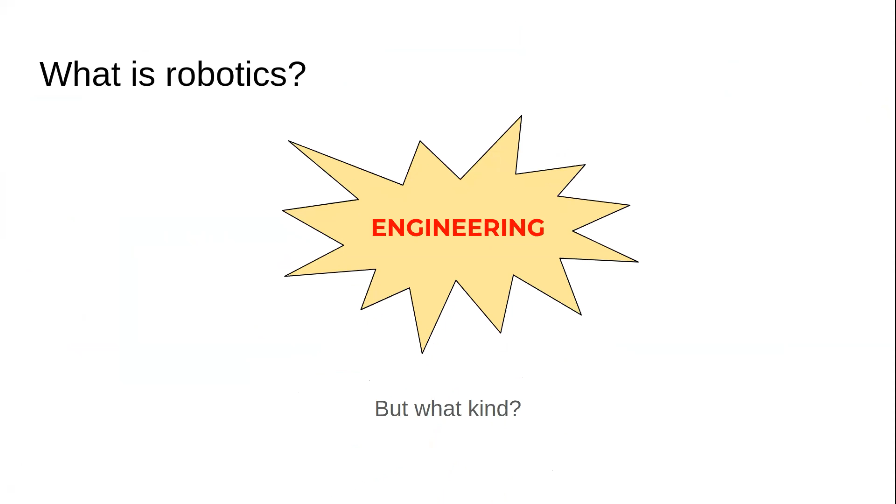Okay, so what is robotics to me? Well, fundamentally, it is engineering. Robotics is about engineering. But what kind of engineering? Because there's a lot of different kinds. There's mechanical engineering, because some robots have arms, some even have legs, and some have whatever this thing is. I don't know, is that an arm? Is it a mouth? A neck? I'm not really sure. But it's pretty cool, and I guess it can be useful. Whatever it is, it's very mechanical, and if you want something like that on your robot, you've got to be pretty good at mechanical engineering.

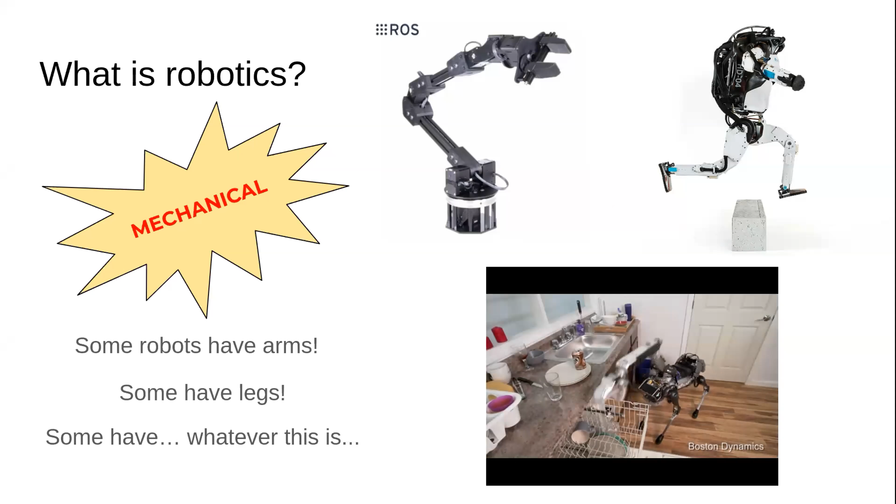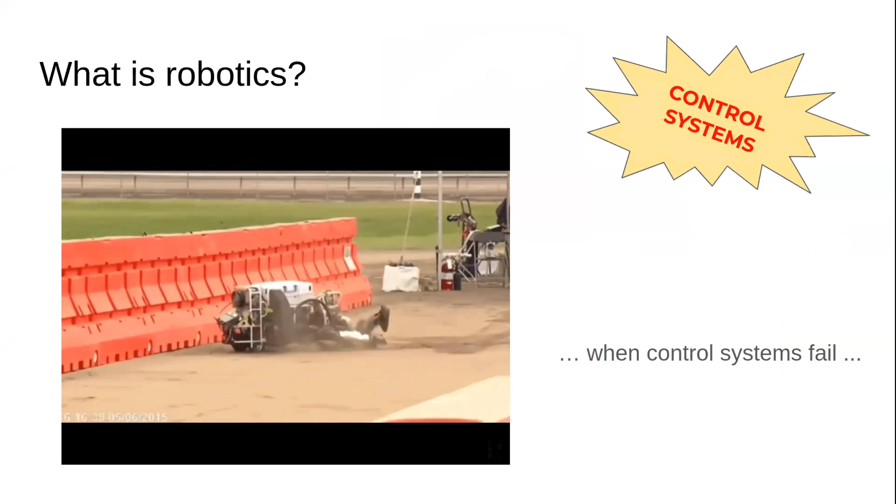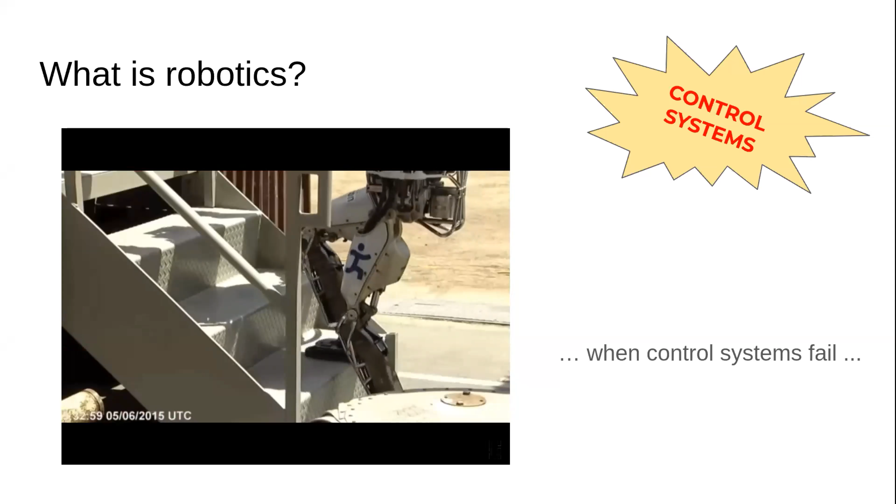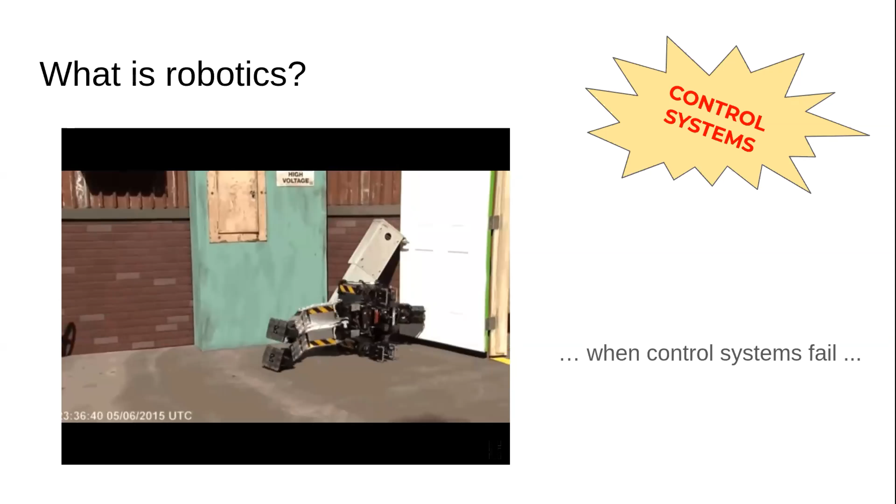What else is robotics? It's control systems, because this is what happens if your control system is not good enough. You need to be able to make really good control systems for your robots, otherwise this happens. Mechanical engineering is not enough, because these robots you see are absolute masterpieces of mechanical engineering. This video is from about 5 years ago, and these were the best robots in the world, the most advanced mechanical designs in the world. But without a good enough control system, they can't actually do much. Boom, and this is a lot of money, guys, crashing and burning with every single one of these falls. Very expensive, this video is very expensive.

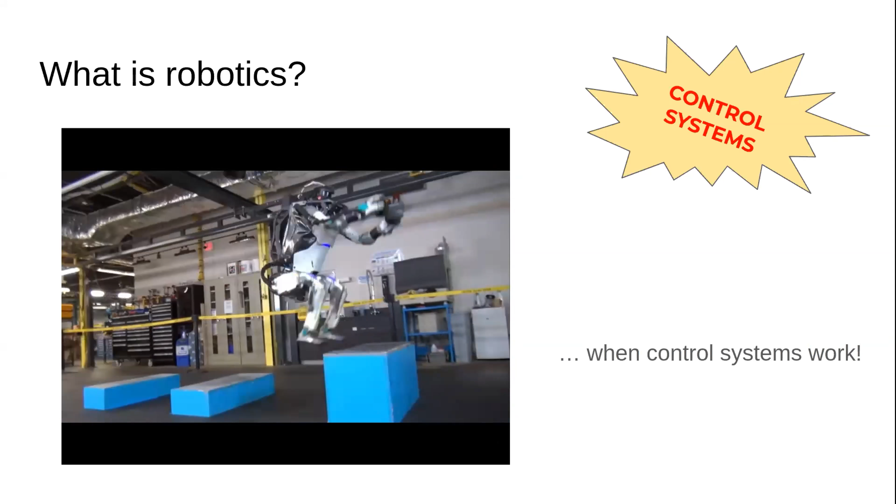All right, so what happens when you do have good control systems? You can get stuff like this. This is arguably the best control system in the world, developed at Boston Dynamics. Super impressive. I'm sure you guys have seen their amazing videos, and they really have the combination of incredible mechanical engineering and incredible control systems engineering to thank for that.

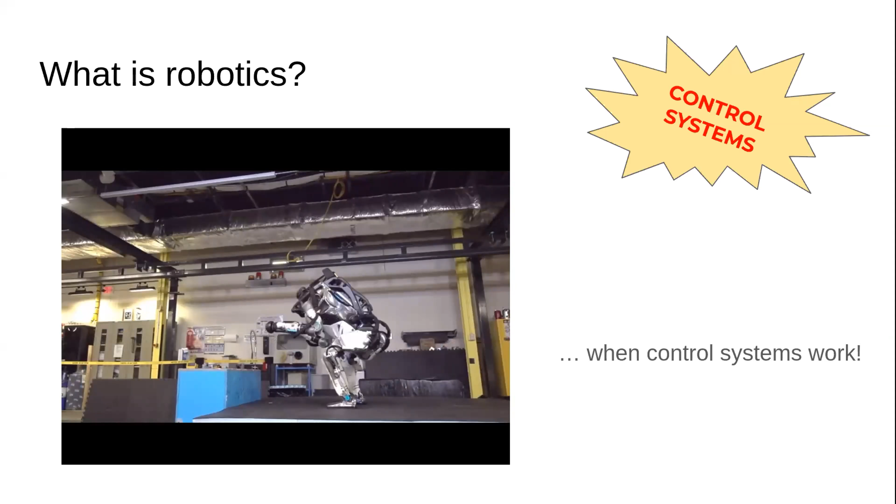Okay, so what else is robotics? It's networking. These days, multi-robot systems are becoming very, very popular. There's a lot of economic incentive to just cram a bunch of robots into one place and have them do useful work. But for your robots to actually do that useful work, not only do they have to have good mechanical design and good controls, but they need to be able to communicate with each other or with servers or something.

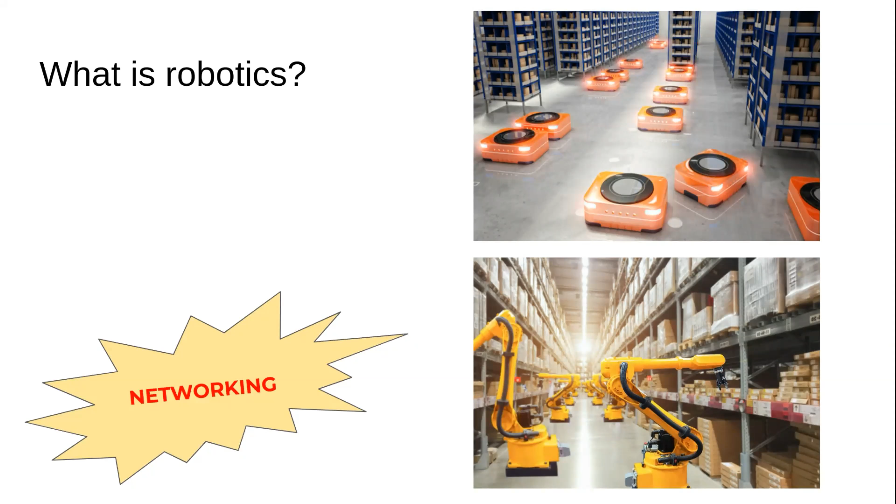So networking is extremely important in modern day robots, and it's going to become even more important over time. That's the trend I'm seeing in the industry: people want lots of robots in their facilities, and they all need to be good at talking to each other. All right, what else is robotics?

Vision and perception. If you want your robot to be able to get around in the world, it needs to be able to see things and understand what it's seeing, or feel, if you prefer other kinds of sensors. But your robot needs to be able to perceive.

So at the top, there's a point cloud. That's a very popular way to get a sense of what's taking up space in your environment. You don't necessarily know what the things are, but you know there is a thing there. And then at the bottom, you can see some object recognition happening. This is almost certainly using machine learning, and it's identifying that there's a bunch of cars, and then it sees the bicycle, and it sees the person on the bicycle, and it's able to create this semantic understanding of what the sensor data is providing.

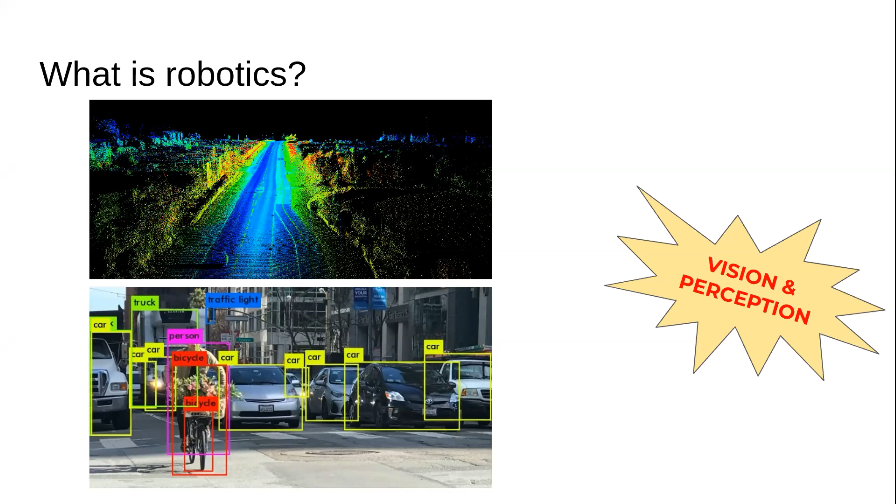Okay, what else is robotics? Artificial intelligence, my favorite.

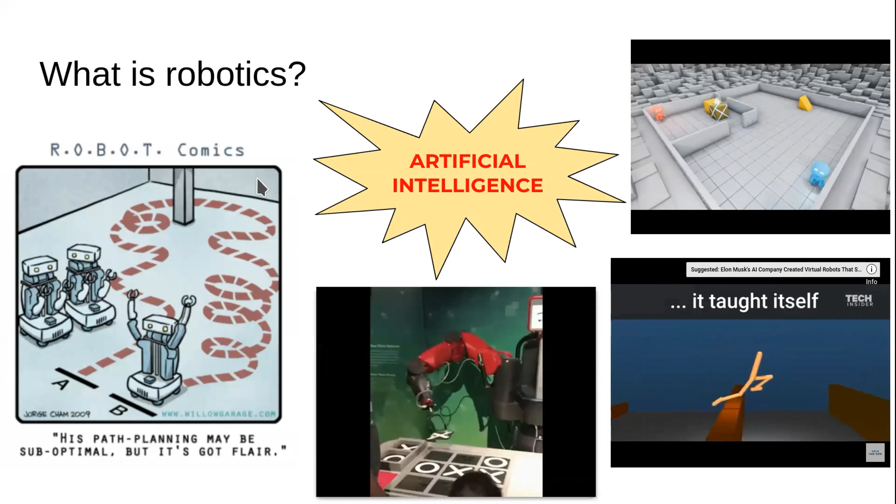Robots need to be able to move around through the world if they're mobile. They need to know how to get from point A to point B. And they don't always do the most efficient job, but they need to be able to get there. And here you can see a robot cheating at tic-tac-toe. Look at those shifty eyes, it knows what it's doing.

And then there's all sorts of more sophisticated AI that usually exists in simulation, but maybe can be ported over to the physical world. So up top, we see these simulated agents playing this competitive game with each other, using some simplification of physics. And then at the bottom, we see a robot learning to walk. It's not quite the same as a human baby learning to walk, but there's some similarities, right?

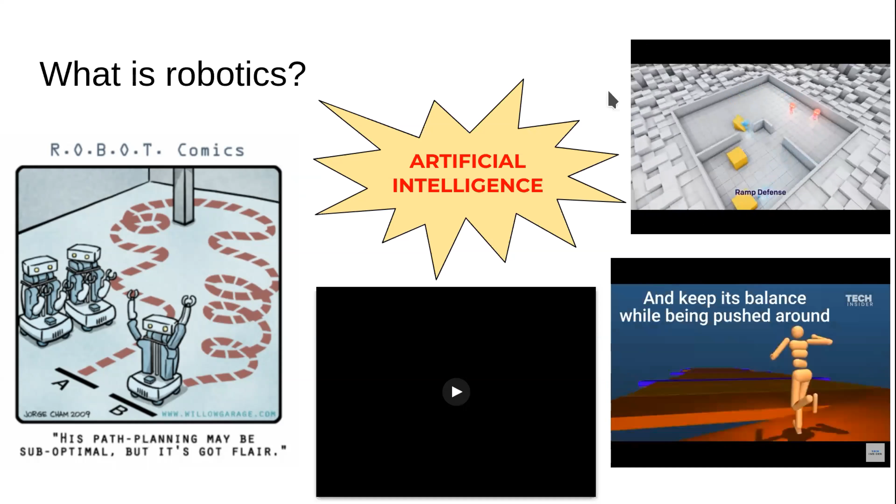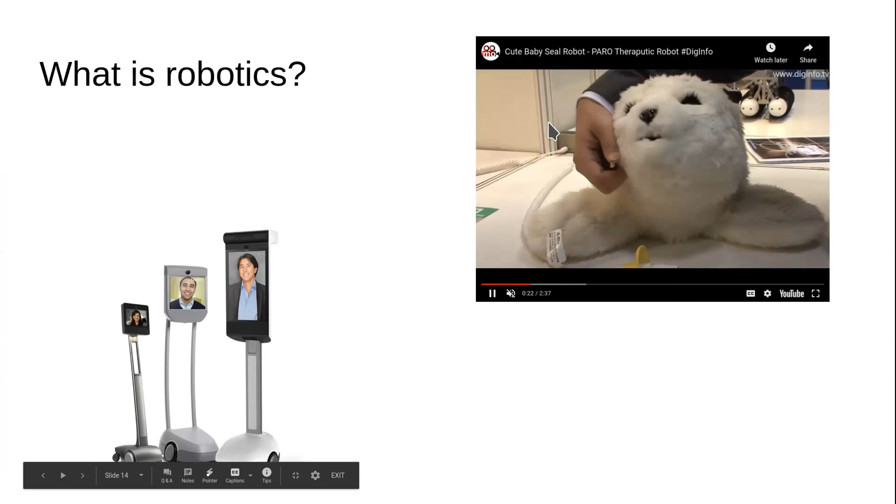Okay, what else is robotics? Human interaction. Some robots need to be able to interact with others, either for telepresence, or there are even robots whose specific design is to make people feel good, to inspire emotions in people. So the seal up here was actually designed for the elderly, to give them a companion.

Okay, so robotics is all of these things, often all at once, all together. So my final answer to this question of what is robotics is: it's really, really difficult and very complicated. These 6 starbursts are each their own entire expertise. You can get a PhD in any one of these 6 things. You can be a world expert in any one of these 6 things and be considered brilliant.

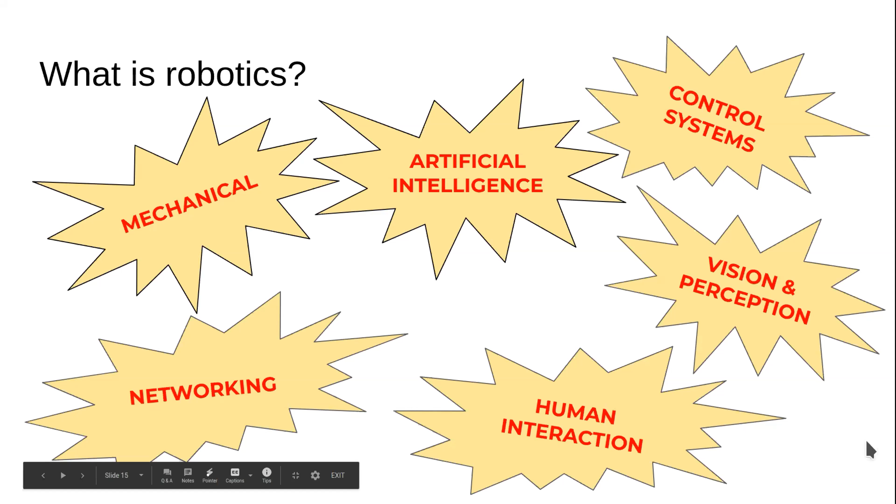But to be a roboticist, you usually have to have a pretty good handle on at least 2, preferably 3 of these topics. If you're really good, maybe 4 or more, but usually people get stuck at around 3. So it's really hard, and usually one person just cannot do it alone. It's generally just not feasible because of the sheer difficulty and complexity. So it's really, really difficult and very complicated.

So what can we do about that? Historically, robotics was only used by large companies that had a lot of resources, companies that could hire a lot of very talented engineers to work on these really tough problems. Robots would only be deployed in extremely controlled settings, so no people around that might make a mistake the robots weren't programmed to deal with. So we're talking warehouses, back rooms, factory lines.

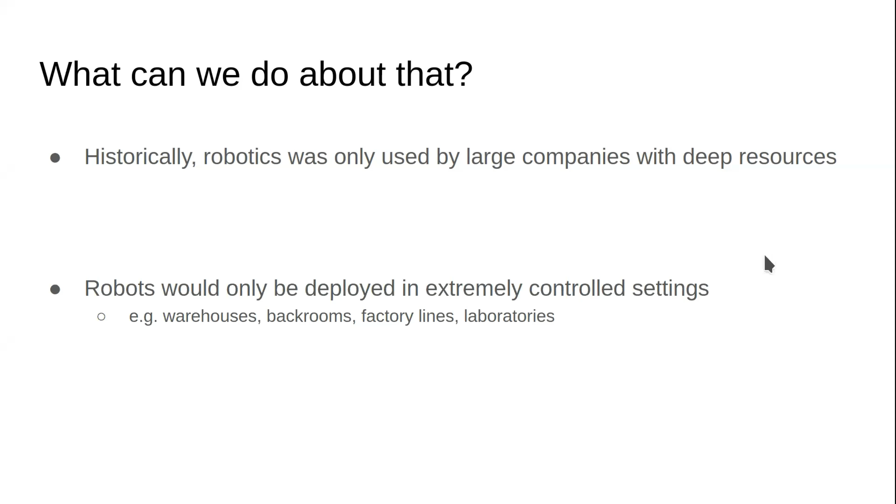For decades now, most robots are literally put into cages. And if you open the cage, the robot just turns itself off, because otherwise, if a person steps in, that person might get killed by the robot. So robots historically have been very contained and very limited in their use. And on top of all of this, robots are very expensive. So even if you have expertise in any number of the 6 fields I mentioned earlier, it's still going to cost you a lot to actually have a robot you can use to research with.

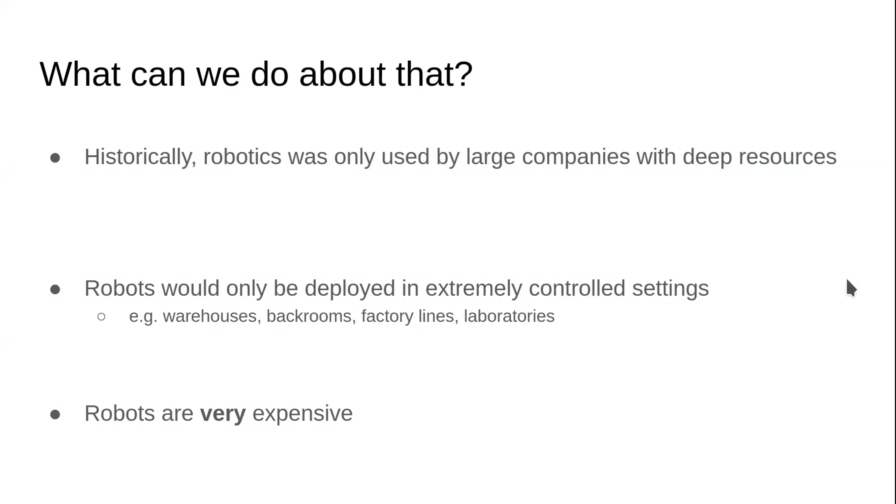All right, and now what can we actually do about that? So I work for Open Robotics, formerly known as Opensource Robotics Foundation, now expanded to Opensource Robotics Corporation, and now we have a Singapore office, so there's even more structural complexity there. But the overall organization we refer to as Open Robotics. That's like a catch-all term for our whole structure.

So we are an open source software company, and we offer 2 major products, ROS and Gazebo. These are both 100% free, 100% open source software products. ROS is a middleware for robotics, while Gazebo is a simulator for robotics.

So what is a robotics middleware? What is ROS, basically? ROS allows communication between different processes in a computer. It also allows communication between different robots or computers or devices or servers. Now, on the surface, that probably doesn't sound all that relevant to robotics. This is an entire description of ROS, basically. It allows communication between different components. So you might be thinking, well, how does that help me build a robot or do robotics or anything?

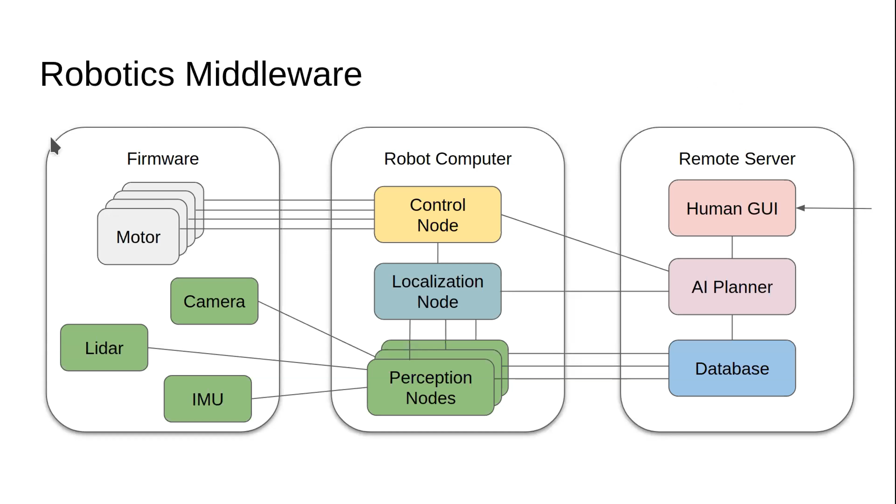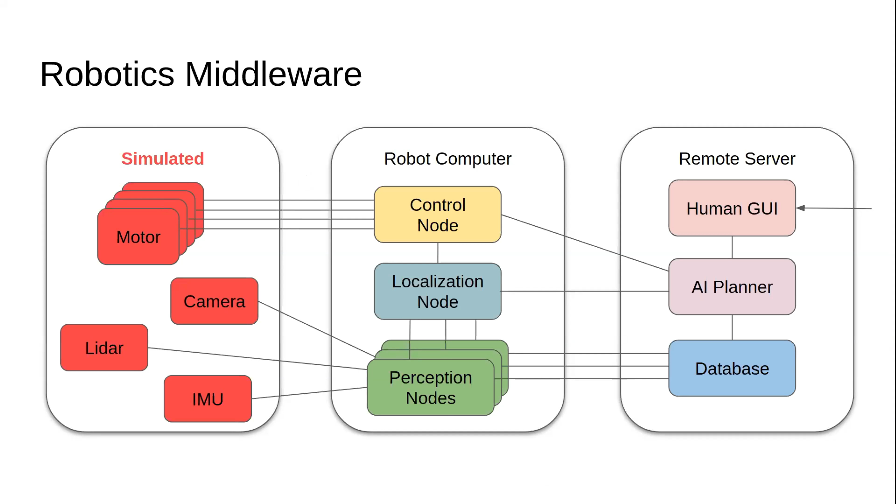So what Gazebo does is, going back to the robot diagram before, this firmware part represents the robot hardware. We can swap that out for simulated nodes. Gazebo will pretend to have motors, pretend to have a LiDAR, pretend to have a camera, and other sensors. All of these nodes send and receive messages in the same exact way that the actual hardware would. So any other nodes you work on will work just the same whether you use them on a Gazebo simulated robot or on an actual physical robot.

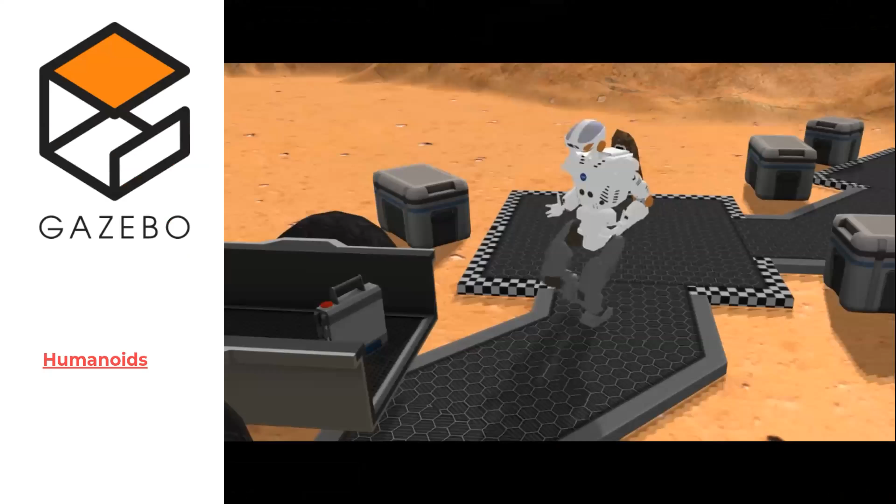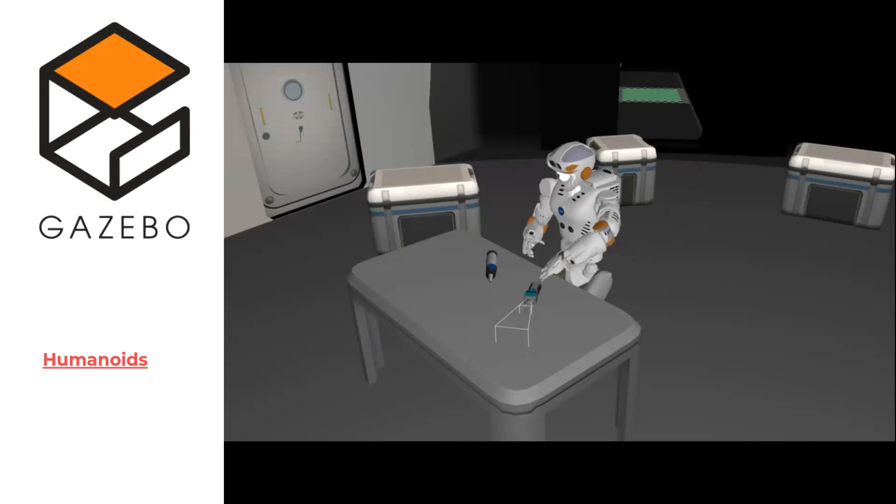Here's some examples. This was part of a space challenge, a simulation competition where contestants had to teleoperate a humanoid robot on Mars. For the competition, you would actually simulate the communication delay that would exist if you tried to control a robot on Mars. So the software the contestants develop needs to be prepared for that delay. They need to design their teleoperation to cope with the huge delays between Earth and Mars, so they try to make their robot as autonomous as possible and require as little human intervention as possible.

The contest involved interacting with various objects and tools. Here, this is scanning for a simulated microfracture. The tool that it just tossed on the ground was scanning for the existence of a crack, and Gazebo was simulating the scanner data. Now it's using a tool to repair that simulated microfracture. And yeah, they just keep dropping tools on the ground, I guess there weren't any points awarded for being nice to your tools.

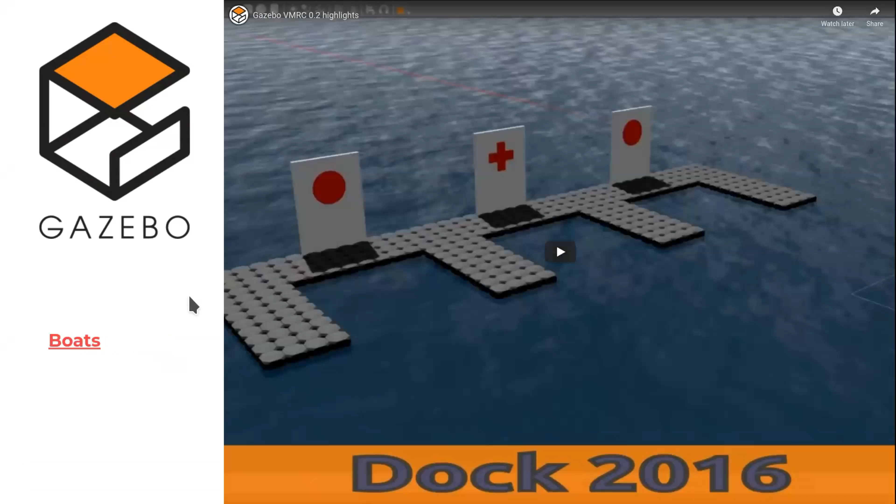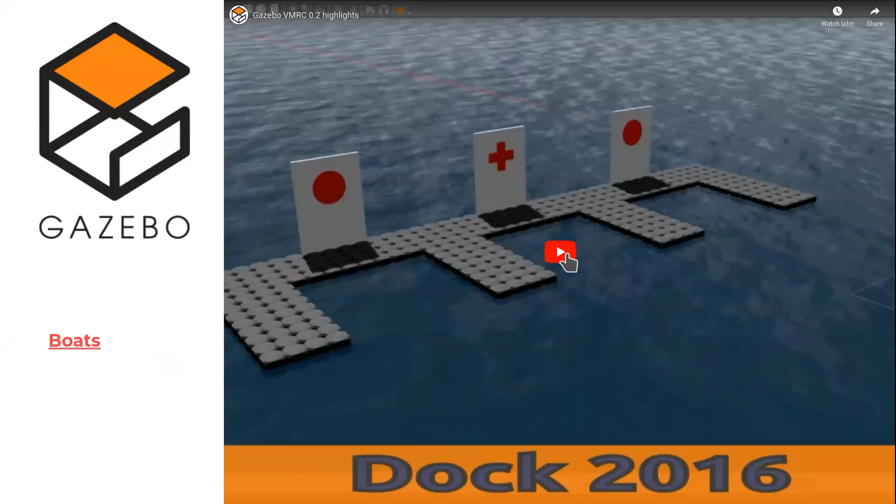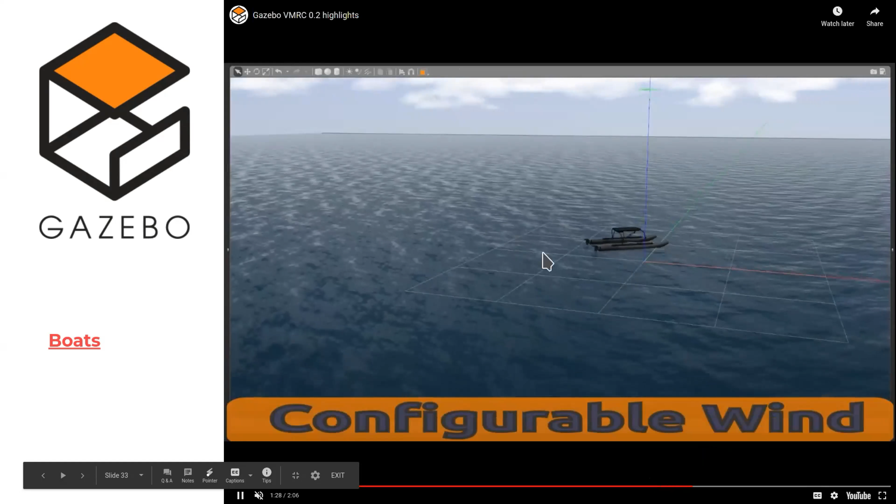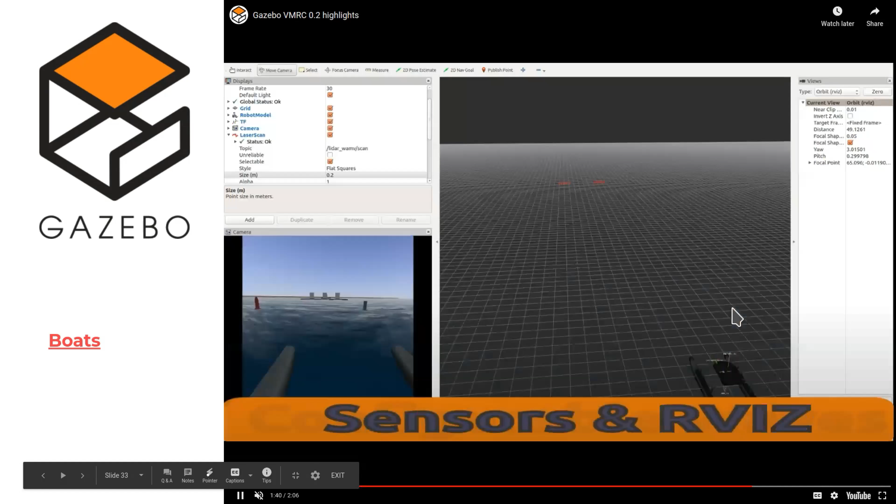And this is all in the same simulator as the other robot and subterranean environment. We get this kind of flexibility in the simulation by being a plug-in based simulator. So to get this buoyancy and drifting, someone, well, I think us, wrote a plugin to tweak the physics of the simulation so that these boats will float and drift. You can write your own plugins to change the way the physics behaves in Gazebo, and you don't have to change anything about the existing software. You could fork Gazebo and rewrite it for your own purposes, but forking is usually a bad idea for various reasons we can discuss later. The point is you don't have to change source code to change the physics of the simulation, you can just write your own custom plugin.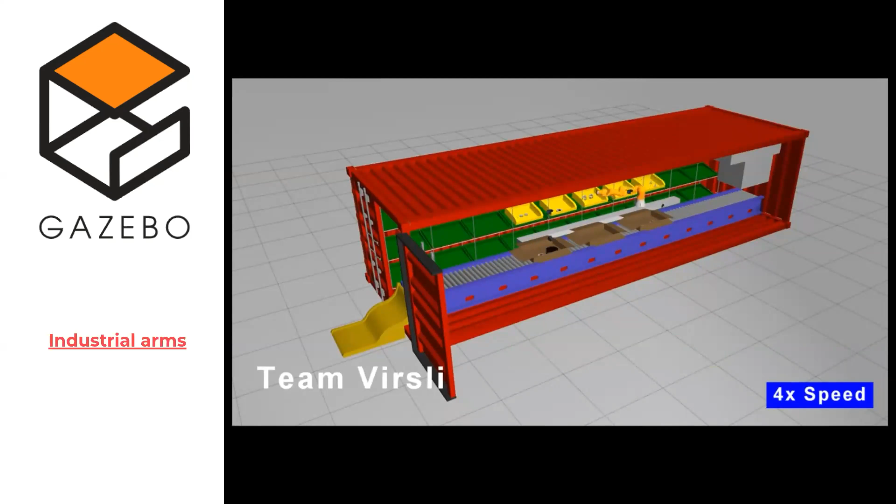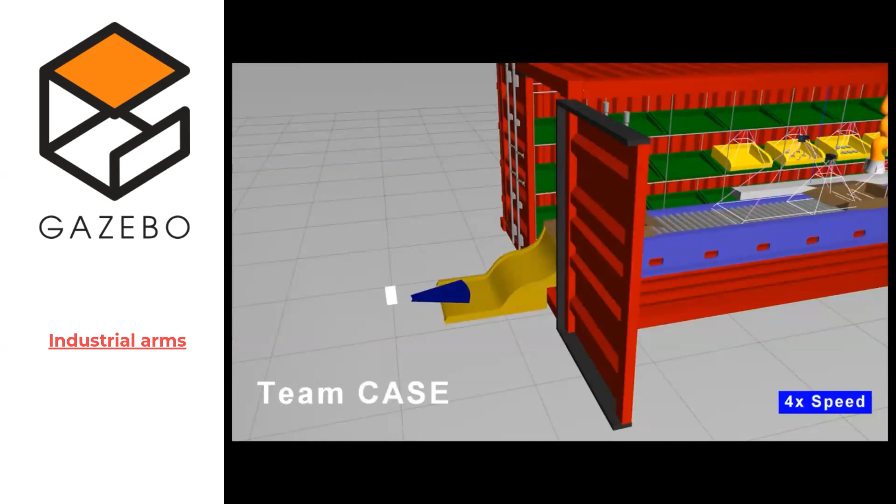Usually industrial robots are very rigid about what they can actually do. Here you see this robot sliding up and down the conveyor belt, whereas usually a robot in an industrial setting is just bolted in place. The goal here was to have one robot that can serve a bunch of different functions.

That could be a way to reduce costs, because robots are very expensive. So if you could get one robot to do the job of 3 or 5, that would be a huge cost saver.

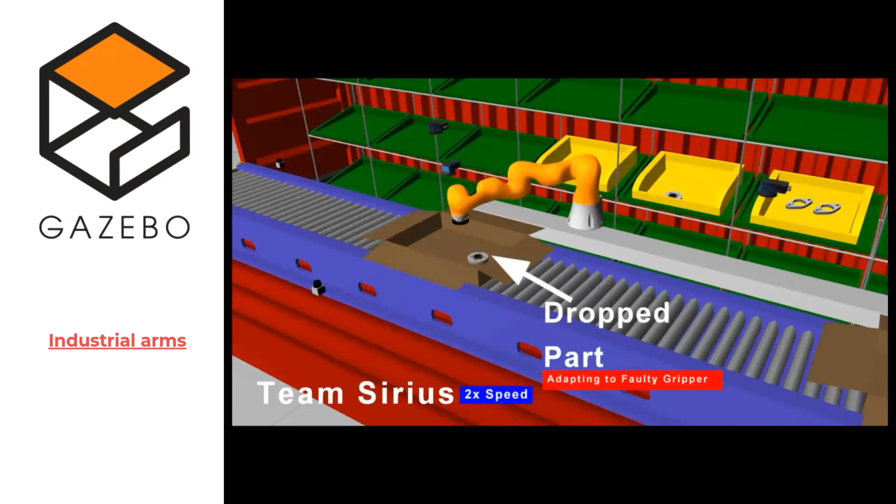This was a competition sponsored by NIST, a US government agency, the National Institute of Standards and Technology, I think. So what you're seeing are the entries of a bunch of different contestants that did pretty well at the competition.

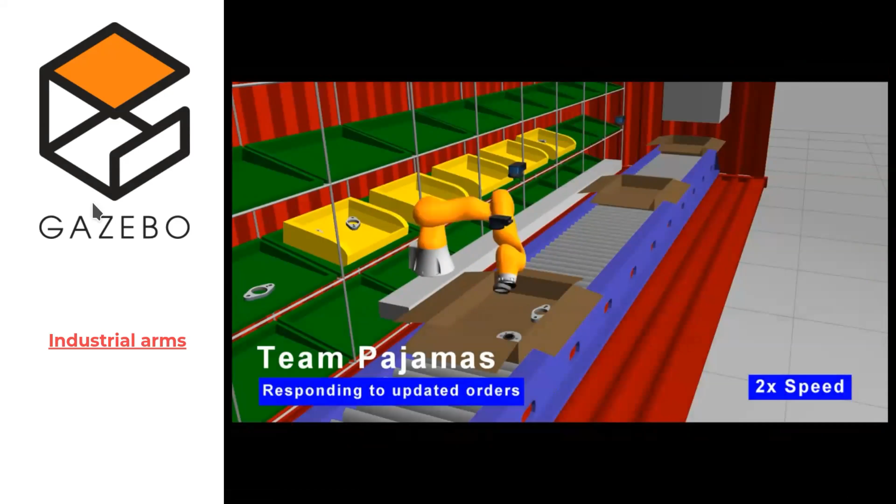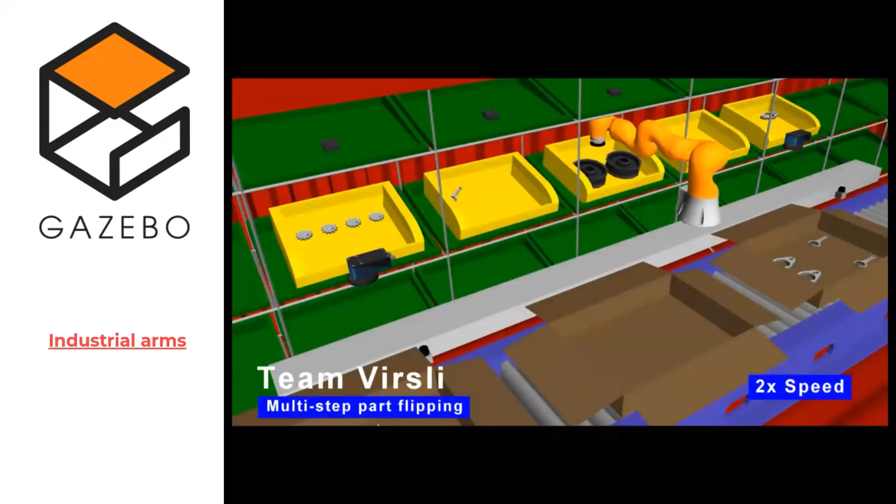All of the source code for this competition is free and open source. So if you want to try to compete—well, the competition is over, but if you want to see how well you can do—the source code is all there, ready to go, ready to be used, just like it was for the contestants.

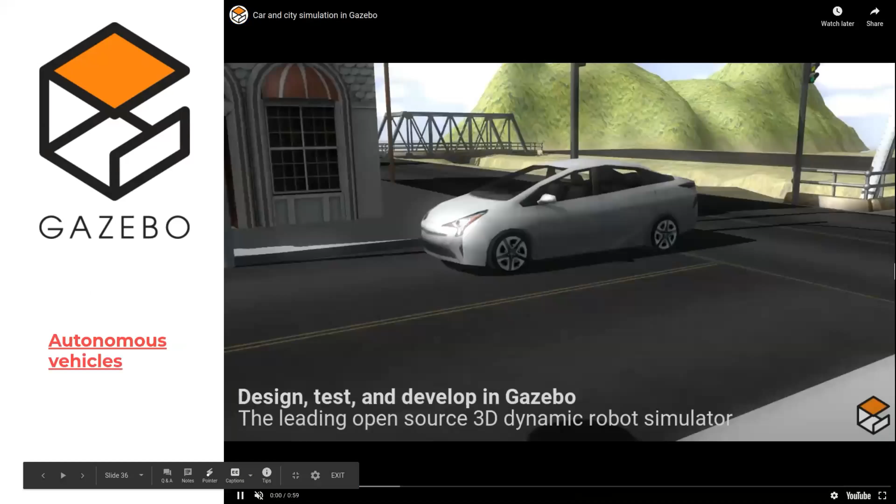Autonomous vehicles are very hot these days, and those can also be simulated in Gazebo. You don't even need any special plugins for that. The hardest part is the art assets.

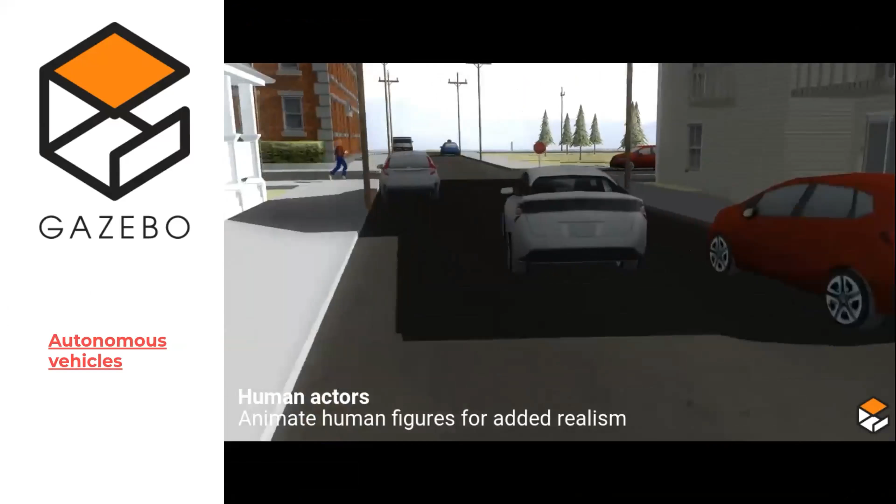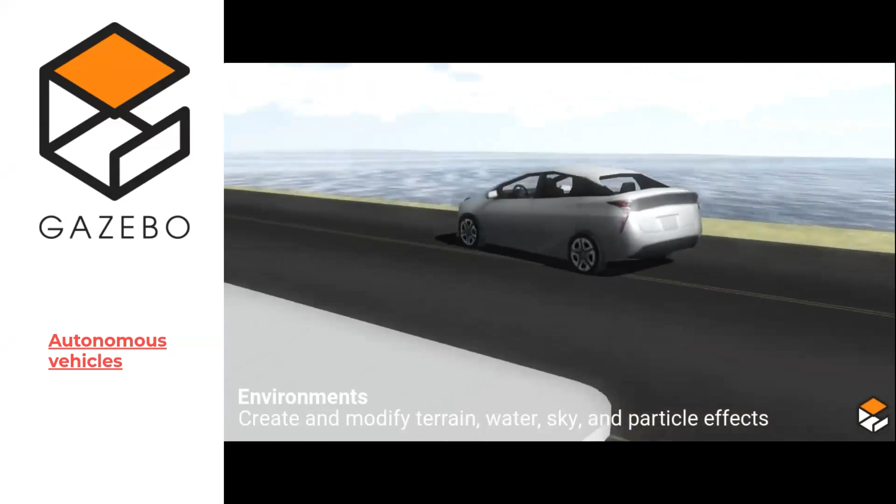I'm sure you can see our little bald men running around there. This video is a few years old, so the art assets are a bit out of date. We have some better human models available in Gazebo right now, but back then all we had were bald, barefooted guys running around.

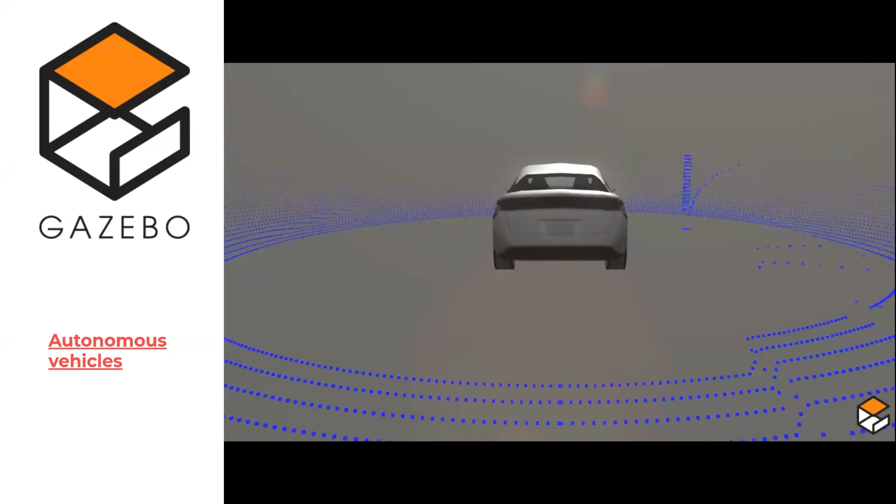Since then, we've actually hired several full-time 3D artists whose job is to develop free, open source art assets that Gazebo users can take advantage of, and those are all available online.

You can also have non-autonomous simulations. Just like you could remote control a robot in real life, you could also remote control your simulated robot. Like I said earlier, Gazebo is literally just a stand-in for the physical hardware.

So if you develop a robotic system that can take human input in real life, it will also work in Gazebo. What we're seeing here is a human actually using an electronic steering wheel, kind of like you'd use in a racing game, controlling this simulated car just as they would a teleoperated physical car.

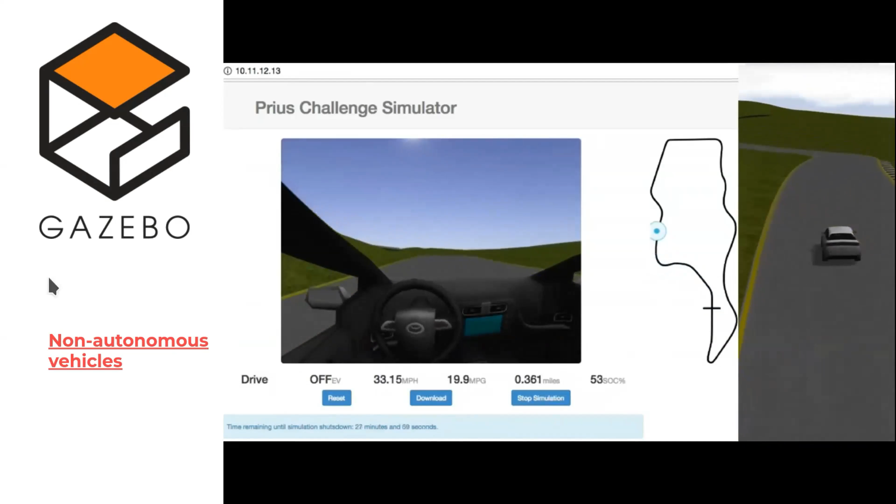So after all that, maybe you're wondering how you can get involved. First, if you're a self-taught beginning user, I'd recommend the ROS1 tutorials, the Gazebo tutorials, and the TurtleBot tutorials, which tie together some of the ROS1 and Gazebo concepts into a single tutorial.

I would recommend using Ubuntu 20.04, the latest stable, long-term release of Ubuntu, and the Noetic Ninjemys release of ROS1. Noetic Ninjemys is actually going to be the very last release of ROS1, because all of our effort is moving to ROS2, which we can talk about later if anyone's interested.

But if you are a beginner, I recommend using ROS1 right now rather than ROS2, especially if you're self-taught. The reason for that, very simply, is that a decent amount of tutorials exist for ROS1, but do not currently exist for ROS2.